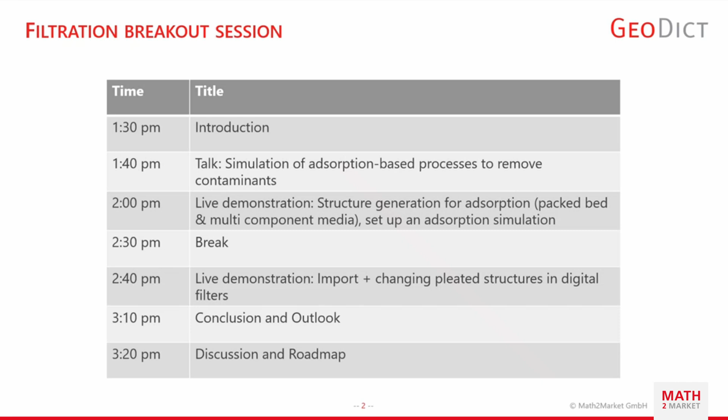Then we'll have a small break, depending on where we are in the schedule, to get some refreshments and coffee. We'll continue with a switch from media scale to element scale, where Christopher shows importing and changing pleated structures in GeoDict at the larger simulation scale. Then we'll conclude and give a brief outlook, including the roadmap and open discussions for further developments in the filtration business area.

The first live demonstration will be presented by Jonas Schabernack from our support team. It will briefly include the generation of packed bed structures, which are key to many processes dealing with adsorption, from carbon capture or direct air capture applications, to toluene and other chemicals harmful to humans and to engines.

Then the generation of combined filter media. This isn't specifically new in GeoDict, but we see it as one of the latest and greatest features, dealing for example with combi media, which are very prominent in cabin air filtration applications, including active carbon layers.

Last but not least, we'll give a short glimpse of how to set up an adsorption simulation: what the input parameters are, what we get as a result, and how we can visualize it.

The second live demonstration is given by Christopher Kühnle, one of my team members in filtration. He'll focus on the larger scale, as shown in the two pictures here, showing how we can import CAD structures from filter elements or complete filters with housing. He'll also showcase one of the features from last year's GeoDict 2024, where we implemented the generation of cylindrical pleat structures, allowing you to change the pleat count and pleat shape.

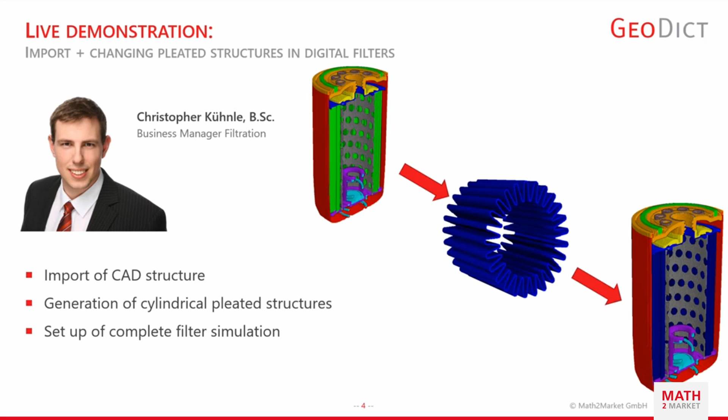From our end, as we saw today in the presentations, there's a large variety of new topics. Just to briefly summarize one key feature especially for the filtration industry: tomorrow we'll also see a presentation for our publicly funded project called ElexSim. This project runs for two years and adds an add-in for FilterDict, with the goal of tackling electrostatic forces, which have already been implemented in GeoDict, but which we're trying to improve and enhance.

One point we're already working on is a specific add-in for ElexSim, which now sums up all the electrostatic features. We implemented electrostatic decay, so electrostatics become less and less as more particles are deposited on top of the structure. We also implemented a dielectrophoretic force, and enabled different modes of fiber charge. To show that our implementations are correct and validated, we demonstrated that we can verify this with results from ANSYS.

But in GeoDict, instead of taking days, we simulate this in minutes. Open points still include ongoing validation work, and of course gaining new insights into electrostatics in general.

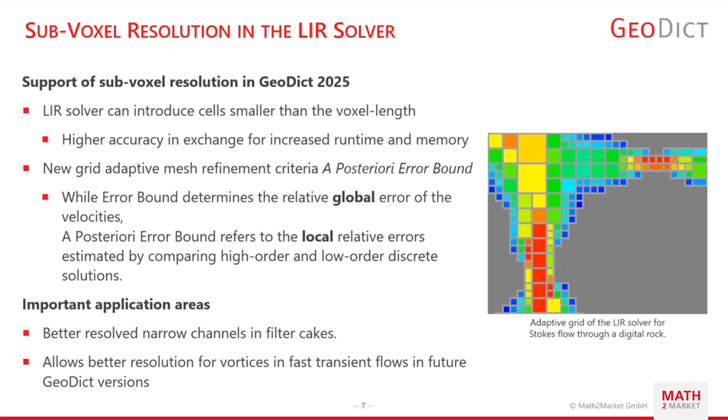Last but not least, one feature which is not specific to GeoDict 2025 is that we can colorize the particles in FilterDict by different parameters. First of all, we are able to analyze the depth of the particles and efficiency, so we can see if specific particles, how deep they reached into the filter media.

We can colorize the particles based on their deposition age, so we can see which particles were deposited in the first batch, in the very beginning, or at the end. This gives nice conclusions on how the filter behaves over a lifetime. These particle-based visualizations can also show residence times, number of bounces, or the status given in the FilterDict simulation, such as whether particles are trapped or outbound. These things help you understand your filter and give more insights into your applications over lifetime simulations.

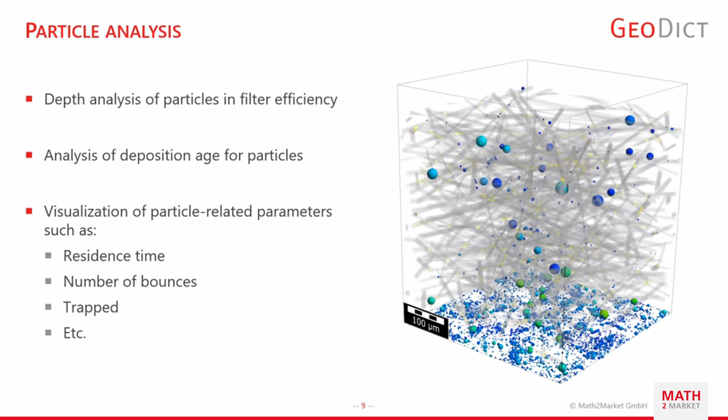Now I will move to the presentation of the newest feature in GeoDict 2025, on the topic of simulation of adsorption-based processes to remove contaminants. This is an additional feature in AddiDict, and I will start with the technique: how do we solve the adsorption, what assumptions are we taking, and which input parameters are needed. Then I will proceed with the validation, showcasing two validations to demonstrate that the method is valid. Then I will give an outlook on possible applications, both on the media and on the elemental side, which can give you ideas on how to use this feature in the future.

As already mentioned in the beginning talk from Martina about the new features, adsorption is a crucial process used in filtration of gases, contaminants, vapors, or odors.

And two important materials to mention here. So this is activated carbon and zeolites, which have the tendency to have large active surfaces inside of the structure, which are prominent to use in adsorption at the surface of these inner surfaces.

The specific areas we are having is clearly water purification, where we have very small contaminants which need to be removed. Pharmaceutical applications, where specific pharmaceuticals need to be deposited on larger surfaces. Classically, also cabin air filters in cars or in general in vehicles tend to have active carbon layers inside. Fertilizers in agriculture are one of the specific areas, to protect the farmers from the chemicals or pesticides.

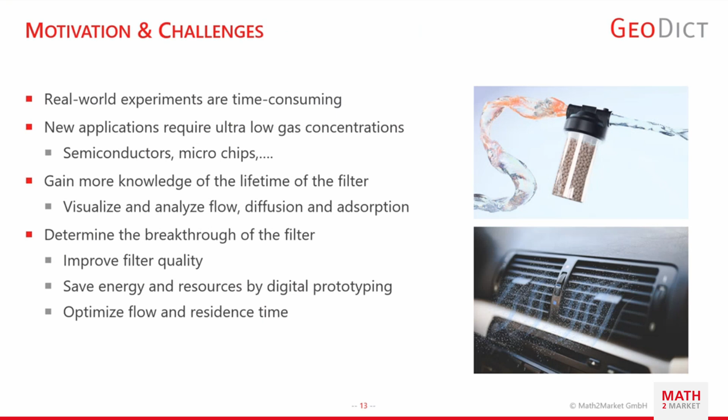In this sketch, I will show the adsorption process, how it's calculated in GeoDict. So as an input, we always calculate the flow around the structure. So we simulate the carrier gas flow. And one important parameter which we necessarily need is the diffusivity inside of, for example, activated carbon or zeolites. For the fluid, this is just a literature value for diffusivity, but it's quite challenging to get this effective diffusivity for the adsorbent material itself. It can be done experimentally, which is quite tedious or expensive, but we also offer the opportunity to calculate this in GeoDict itself.

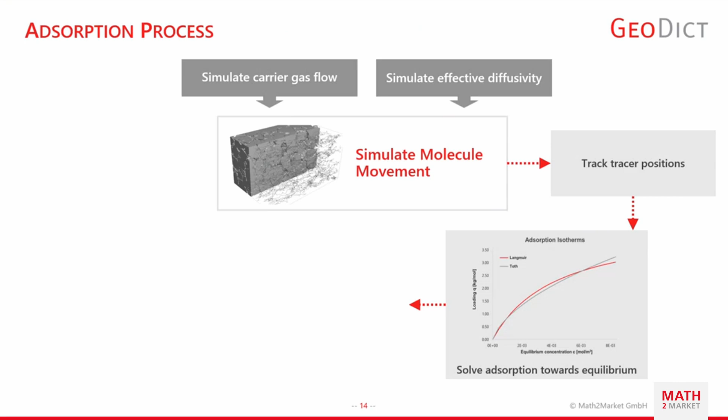After we have all the input parameters, we simulate the molecule movement of the particles and tracers. We track the tracer positions and XY coordinates. And then we use the Langmuir and Toth adsorption isotherms, which are, I think, well known in this regard. I will come to that detail in the next slides, and solve this adsorption towards equilibrium, so that we see how many free spaces are open, where we are at the adsorption isotherms, and how many places can be settled.

We then update the adsorbed load in the structure depending on how many particles have been deposited on the finite number of deposition sites. And then we calculate if particles reach the outlet concentration. And this gives us feedback for the breakthrough curve, which is one of the results we are obtaining. And this simulates one batch for an adsorption simulation. And we can, of course, in GeoDict simulate several batches, which then increases, as we see in the last slides, the concentration at the outlet with increasing number of batches.

On this slide, I will just briefly highlight the equations we are solving. So for the flow, we simulate Navier-Stokes-Brinkman equations. As we always deal with porous media in the adsorption simulations, we always take into account the Brinkman term. And for this, we also need effective parameters like the permeability and porosity, for example. The parameters for that are purely obtained from the adsorbent directly and from the conditions of the flow.

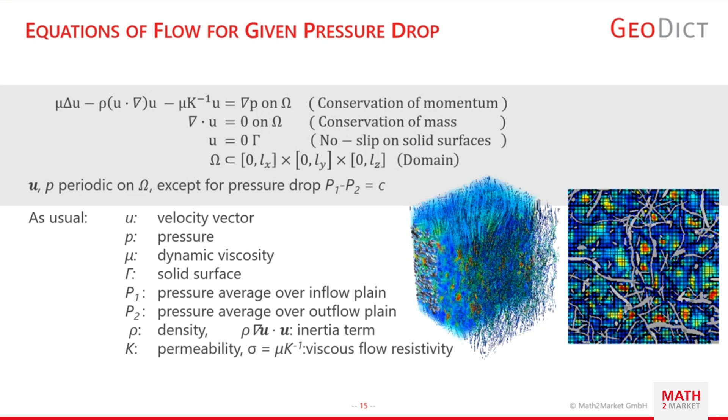I don't want to get more into detail with that, but we can also simply solve only the Stokes-Brinkman equation, so the inertia term is dropped. This can be also done, depending on the application and the flow rate we are having in the gases. The adsorption isotherms we are using are Langmuir and Toth. So I think most of you will be familiar with the most famous isotherm, the Langmuir, which considers just homogeneity of an adsorbent surface.

We have a finite amount of adsorption sites at the surface, and we can only adsorb one molecule or one tracer per adsorption site. This model is only valid for a monolayer, and we don't have interactions between adsorbates. So there's no interaction between the tracers during the simulation.

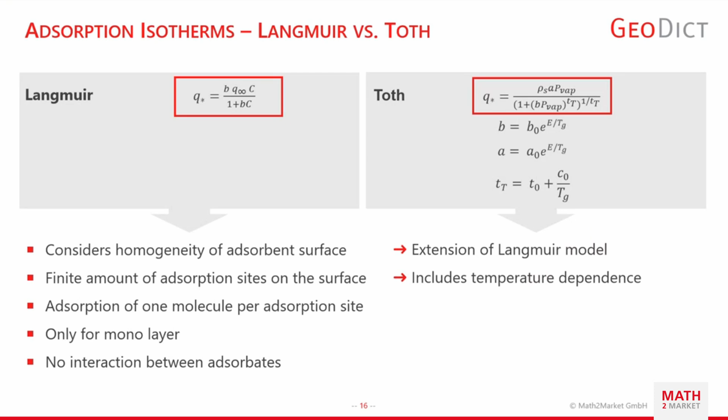We also took into account, for example, the Toth adsorption isotherm, which is an extension of the Langmuir model. It's a bit more complicated, so we need more coefficients from the laboratory experiments, but we also include temperature dependence. So we have, for different temperatures, different Toth adsorption isotherms. And this can later also be used, for example, for desorption, so that we have different adsorption isotherms at different temperatures to simulate desorption again.

And this is done over batches. So these bind to the surface until there are no adsorption sites left. And then at the end, the concentration at the outlet increases. Molecules can also detach and switch back to the gas phase, depending on where we are in the adsorption isotherm's equilibrium state. For this, classically for GeoDict, we use our voxel-based method. So instead of resolving the microstructure, we are using porous voxels.

The amount of adsorption sites is given by a maximum load, which is Q*. We use tracers inside the porous zone, so they lose or gain concentration, while the porous voxel itself gains or loses the corresponding adsorptive load. So when a tracer enters the porous voxel and loses concentration, the porous voxel gains adsorptive load. The adsorption speed is determined by the gas concentration and the number of free sites, and the desorption speed is only determined by the already occupied sites.

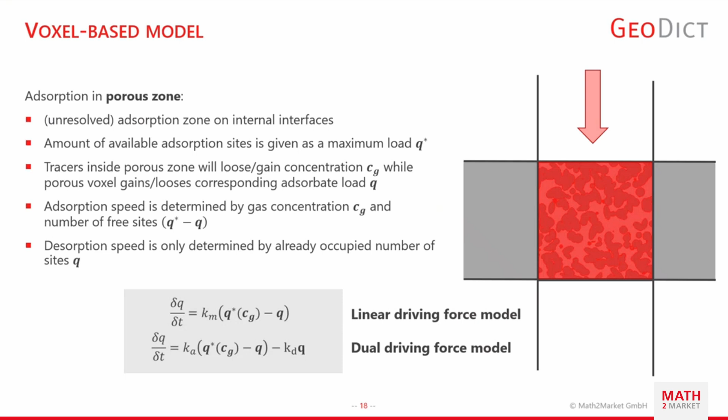For this, in most applications, a linear driving force model is used, which we're showing here. But additionally, if you want to separate the adsorptive and desorptive velocities from each other, you can also choose a dual driving force model, so that the adsorptive and desorptive kinetics can be separated, which in the linear driving force model are merged into one reaction constant.

After explaining how we simulate adsorption, I will go to the next step, which is validation. We have two validations presented here. The first one is CO2 injection on zeolites. Here we use a publication freely available on the internet, where we have pressed pellets of 2 millimeters diameter in a tube with given dimensions. And then we inject CO2.

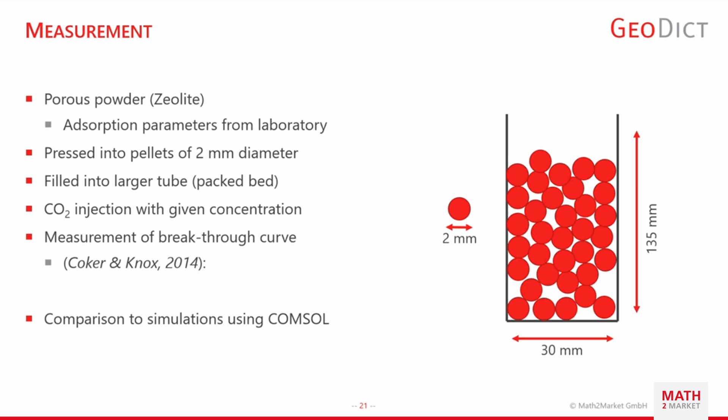The domain size, to get the numbers here, has been 350 times 350 times 2050, which sums up to 250 million computational cells. And in each batch, we used over 500,000 tracer cells, and the runtime has been 40 hours. And I think in this result, there have been around 20 batches. So you can imagine 20 batches times 500,000 tracers per batch in 40 hours is quite nice performance.

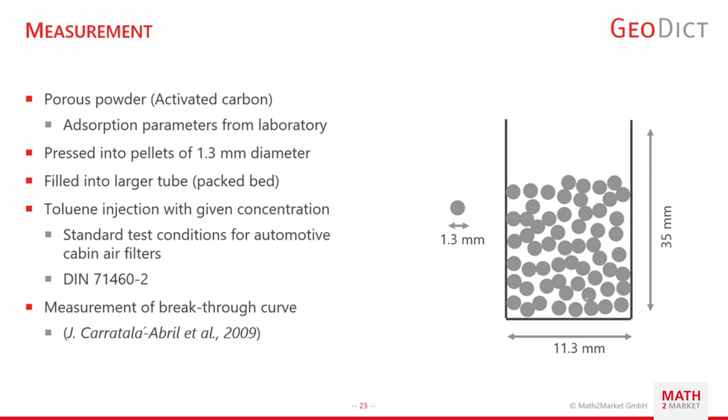The second validation uses activated carbon. And here we are using toluol injection, which is a classical standard test for automotive cabin air filters. And here we have a different tube with different dimensions, and the pellets have been smaller, 1.3 millimeter diameter. The publication was Carratalá-Abril in 2009, where they measured the breakthrough curve. And what we also see here is that we have a very good agreement with the measurements.

The domain sizes here have been more or less similar to the previous validation. We have 320 times 320 times 1,250 voxels, which sums up to 128 million computational cells. And we used 390,000 tracers per batch, which adds up to a runtime of 41 hours.

So with validation, we showed that for two very famous systems, CO2 with zeolites and toluol with activated carbon, we can reproduce the experimental measurements with GeoDict very well, which gives you the confidence to use the feature in your applications. And now we'll go for the application itself, giving some ideas where you could use this adsorption feature in your application.

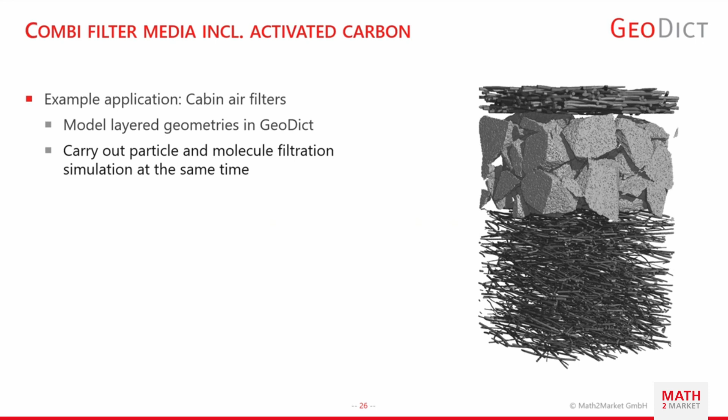One example I already mentioned at the beginning would be cabin air filters. This is also a topic in the live demonstration, which follows soon, how to use them in GeoDict. So we see here activated carbon beds, which are set between two non-woven layers. And here you could also think of carrying out particle and tracer filtration at the same time. That's also possible in GeoDict.

What we see here, for example, is the adsorptive load: at the beginning, the particles come from the top to the inner. Things to optimize here would be giving enough time for the adsorption to happen, increasing the surface area through smaller particle diameters, and choosing different materials to enhance the filter performance. This also gives a benefit to the suppliers, for example.

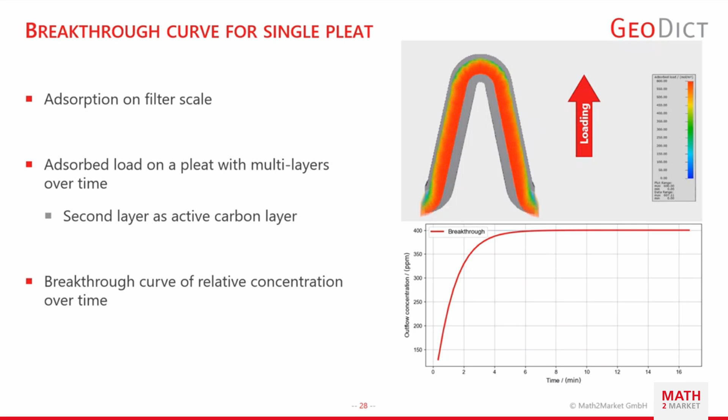The breakthrough curve is also highlighted on the right-hand side. And using this in combination with the pleat optimization would give feedback on, for example, how much adsorptive load is necessary, and whether we can make the layer thinner and have more pleats in the same surface area active for adsorption.

The same applies when we have several pleated structures to represent larger domains. The same also applies to the second live demonstration of Christopher, where we can load CAD structures and then put cylindrical pleats with several layers into them, and simulate on entire filter cases the adsorption and the flow. So this gives you 2 parameters. We have the flow, which is anyway of key interest for digital filters, but we can also simulate adsorption at the same time or in a coupled simulation.

One topic to address is the desorption again. So this, for example, is the more or less reverse option for the adsorption. So here we can use an already fully adsorbed structure, and we can simulate this desorption. For this, we load the structure, and then we can, for example, increase the temperature, which is then represented by a different equilibrium by either Langmuir or Toth, which is at a different temperature, which then features more the desorption of particles than the adsorption. And simulate then here the desorption process.

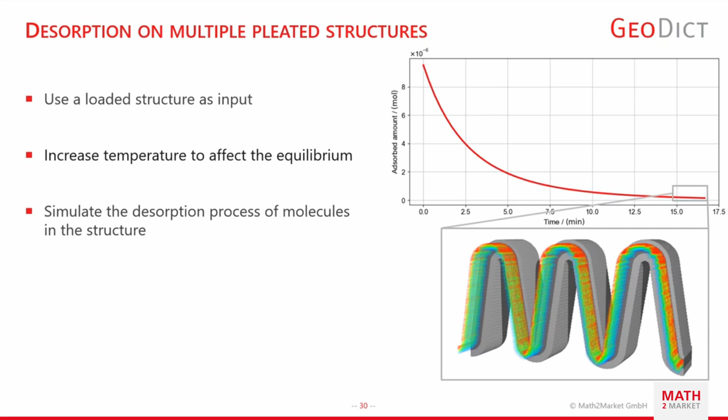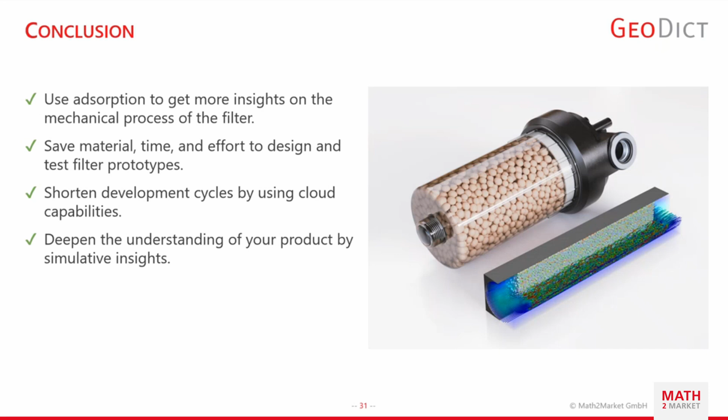A small outlook, we'll come to that also later on when we look at the roadmap. So far, the adsorption has not been validated. We will look out if there are possibilities to do that. The equations we are now using are only focusing on gases. We'll also extend them for liquids to use them also in, for example, water treatment. Temperature changes during the process: we know that when we have adsorption taking place, most of it is an exothermal process, and therefore temperatures locally may change. So this is also something we have on our roadmap.

And on longer terms, we have also a presentation tomorrow which deals with part of that, is that we have an entirely new solver, which is not Lagrangian-Euler-based anymore, using tracers as we're using now, but we can use here an Euler-Euler approach, which then moves concentration fields through the domain. This is a lot more efficient, and we can also use it in high concentration fields. But I think to have both options available in GeoDict is very nice: when we move to very low concentration applications like semiconductors, microchips, and when we have large concentrations, we can choose a different solver, which is more efficient, and cover both applications.

Yeah, then thank you from my point, and I will hand over to Jonas to give a live demonstration on the structure generation for adsorption and adsorption simulations. Thank you.

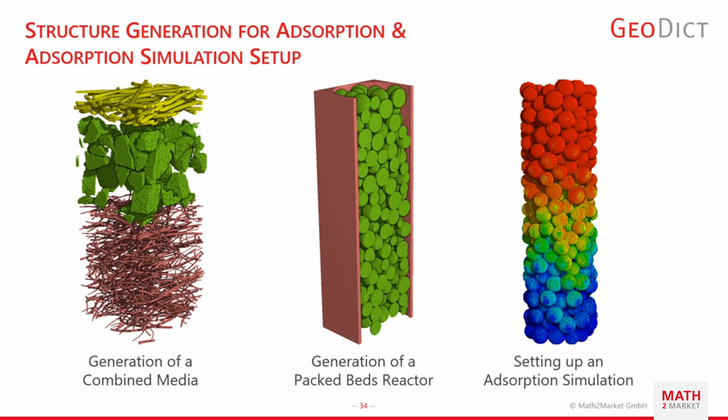And so for the first part, we will create this combined media. This consists of these three layers that we've seen before, two fibrous layers and one activated carbon layer. So I will start by creating the first fiber layer, and I will use FiberGeo and create fibers for that. I first rename this. This will be our bottom fiber layer in the end, so I will just rename this to this. And keep the settings as is, create it a little bit larger in Z direction because we want this stack. We don't want any fiber overlap because it's quite unrealistic if we look at a real sample. In this layer, we want quite a low volume percentage.

And in the fiber options, I just removed the default ones. Here we use some curved circular fibers, and we use two different types. And now we want to set the volume percentage of each of those, and we just want 50-50. I can change this here. And then we can set the diameters. In this case, we choose a Gaussian function for the distribution of the diameter of these fibers. And this mean value here is 4.5, and then we just have a distribution around that we can see here.

The length we will increase to double the size in X and Y direction because we don't want too many fiber ends in our structure in the end. And the orientation should be anisotropic, which it already is by default, but we still increase the anisotropy a little bit more. And you can see it favors the X direction and mostly in the XY plane.

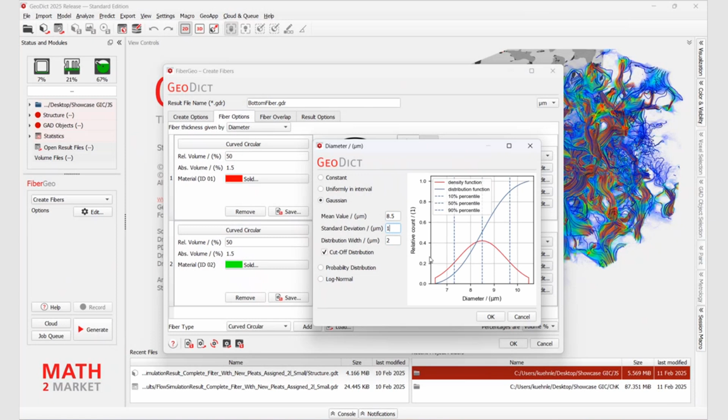For the second fiber type, we will do a very similar thing, but we increase the mean size of the fibers here. And we also choose the same parameters here. Don't change this. And we will increase the anisotropy a little bit.

So now with these settings, we can already generate our structure, which will only take a few seconds in this case, because the longest part here is to remove the overlap. And because the solid volume percentage we have here is quite low, this will be very fast. We have the debug output. Don't need that. So here we can see the voxels that are overlapping, and they will be currently removed by moving these fibers around. But here it's quite easy to find the ideal structure without any overlap.

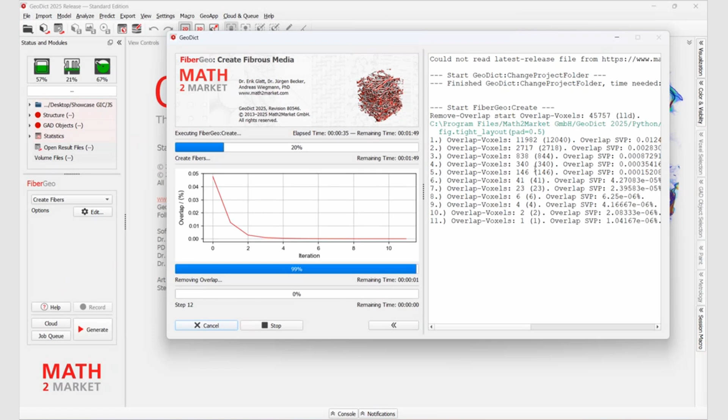And when this is finished, we can continue. It's finished now. Get a result file, which we don't need right now. And then we can have a look at the structure in 3D. Visualize this a little bit more nicely. And we have these two fiber types in our structure.

Now for the final sample, I want these fibers to be the same material. So I will reassign material ID and change all of the fibers to one material ID that we have then in the end.

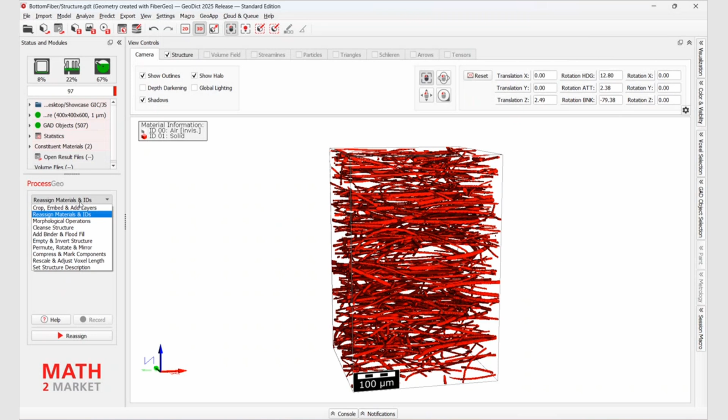So the next stage is to create these activated carbon grains. And these we want to pile into our structure. And for us to be able to do this, we need some empty space. So we also use ProcessGeo, and then we embed our current structure. And we will add some empty voxels in Z direction because we are piling the grains from the Z direction. And we also add a little bit of voxels because this will be our inlet if we run any flow simulation later on. So we can just add and we create some empty space.

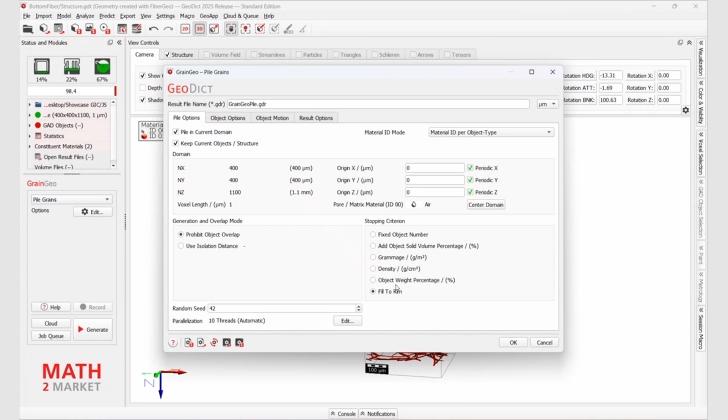And now I will just flip this, so the grains that we are piling in the next step are coming from this direction. So we go to GrainGeo, and we want to pile our grains into the structure. To be able to do this, we pile in our current domain, and we also want to keep the fibers that we have right now. We don't want any overlap, and we just want to fill it up completely in the objects.

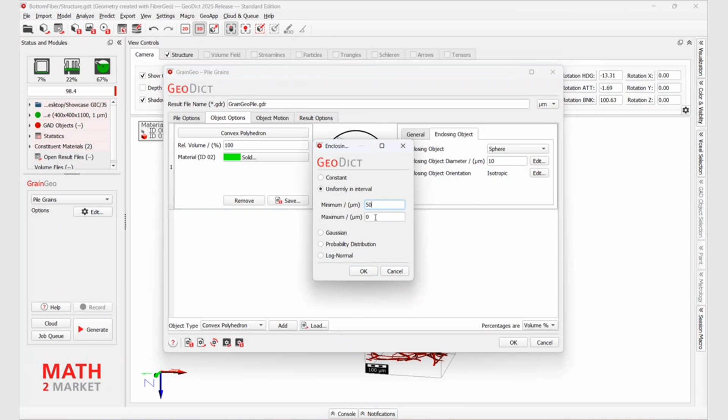So now to create these activated carbon grains, what can be very useful are these convex polyhedrons. And here we can define quite complex polyhedric structures. So here we change the point mode, how these points are distributed to the surface. And we also want to vary these corner points a little bit. So here we choose uniformly, and we want between 7 and 10 corner points, not that many. And then you can define an enclosing object. We can stick with the sphere here. And we also want a uniform distribution, and we go between 50 and 200 micrometers.

Then we define the object motion, so how the piling is basically simulated. Because of the time constraints we have here, I will reduce these requirements a little bit. So this will not be the perfect piling result, but it will be quick enough. So with this, we can start to pile them. And this also depends on the geometry of the particles. These are a little bit more complex than spheres, for example, so this takes a little bit longer, but it shouldn't take too long, I hope. It should be 1.5 minutes roughly.

And as a result, we will have these grains piled on top of our fiber structure, but they will be quite artificial still because they have completely flat planes between those corner points that you will see. So I will show you a bit more functionality afterwards, how you can make them a little bit more realistic.

And I guess this time overview in this case calculates with the perfect piling, so this is not correct in this case. It will be quite a large jump after, I think, 7 or 8%. So in this case, we just wait a few seconds. On my laptop, it took 1.5 minutes roughly. Should be the same here, I think. Yeah, I think it's fine. It's 7-8%, and then it will jump.

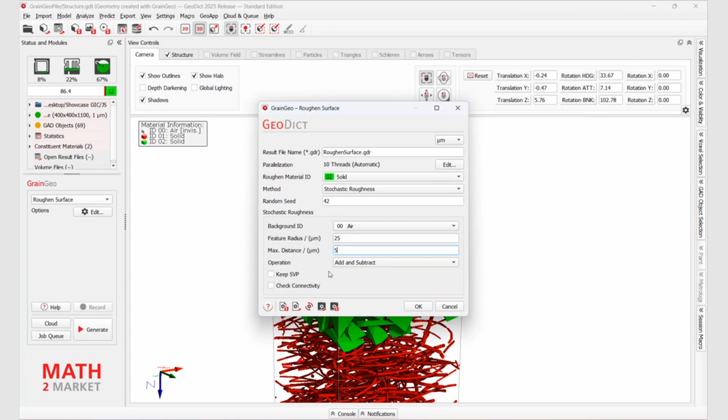So the first thing we can do is roughen the surface to get some variation. We want to roughen our grains, which are solid number 2. We define a feature radius, which we set to 25 here, and the distance for how we want to vary it. Then we vary the surface by adding and subtracting voxels. We also want to check for connectivity, so we don't have anything freely lying around later. This will now go over all the grain surfaces and modify them a little bit.

In the next step, we also want to add some resolved porosity. As mentioned before, these particles have porosity that is not resolved in the simulation, but for these particles we want to add some resolved porosity in addition, so we have pathways that we can simulate later with the flow. In this case, we don't use the structure for the simulation. I'll show you how to add some basically random porosity to these particles in the next step, once this is finished. And in the end, we need to add the second fiber layer as a final step.

It takes a little bit longer than it did before. But now this is finished.

And now, as we can see, we have some rough surfaces on these grains.

To add the porosity, I first need to save the structure, so we can just include what we have in here, and we can get rid of it.

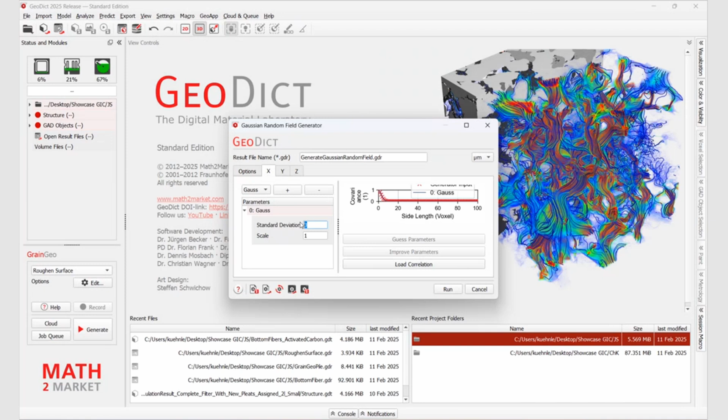To generate some random porosity, we will use a Gaussian random field. Here we need to set the same domain size as our structure had before, which is after the embedding, this size. Then we can define a Gauss function in all spatial directions, and I'll change the standard deviation to 2. Running this, we get a volume field that has a random distribution of values depending on the Gaussian field we've defined.

By using a threshold, we can separate between pores and solid voxels. These solid voxels we can then subtract from our other structure to create some porosity. By tuning the threshold value, we can tune the porosity we want to add.

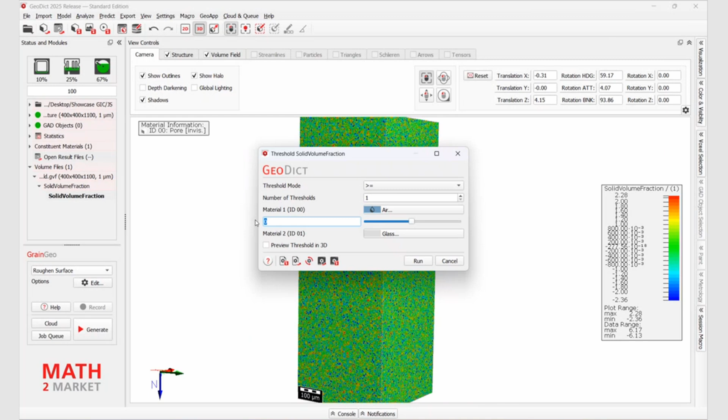So now we have this volume field with the same dimensions. If we right-click the volume field, we can threshold the structure. If we select 0, the Gaussian distribution is centered around 0, so it will be 50% porosity. If we want a little less porosity, I'll choose 0.5 instead. Running this, if I disable the volume field, you can see the structure - 30% is solid, and we will subtract the solid voxels in the next step, so it will add around 30% porosity.

What I also want to do for the structure now, before I save it, is change the material ID. At the moment it's material ID 1 for the solid. I want to change it to material ID 2, and I'll explain why in the next step.

So now we also save the structure as the Gaussian random field, and we load our old structure.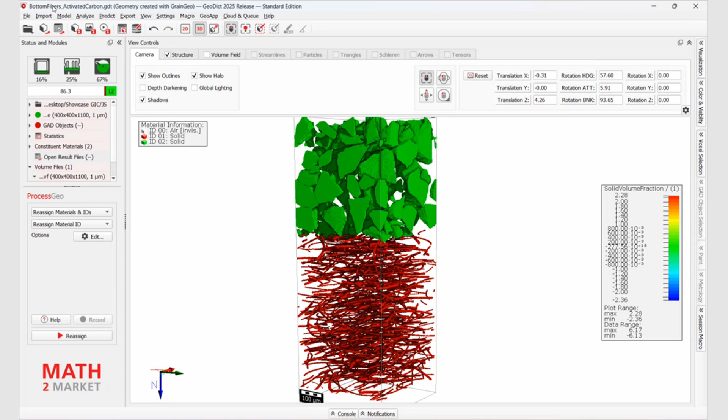Now we can use layer geo to subtract the random field from it, but we don't want to subtract anything from our fibers, which is why I changed the material ID. Now, if I click subtract bitwise, it will only subtract from material ID 2 because it has the same material ID. So now the fibers are still intact, and we have some resolved porosity in these activated carbon grains. We save the structure as well.

We use the same name and add 'porous' in front of it.

In the final stage, we use FiberGeo again to create the second fiber layer. Here we create a new structure for now, which only has 100 micrometers thickness, but has a higher solid volume percentage, 15% I think.

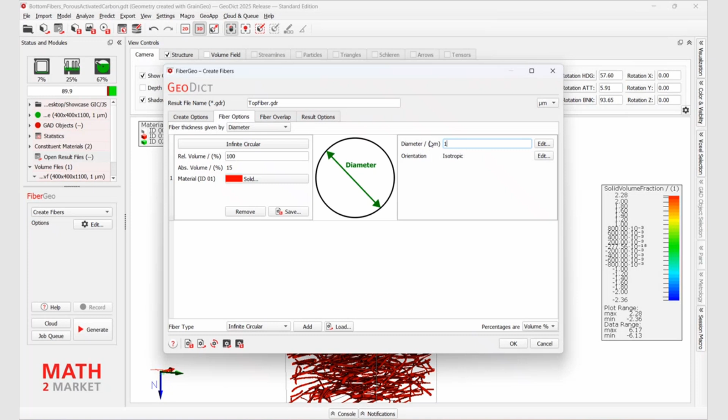Here we use completely straight fibers, so we can use infinite fibers with a circular cross-section, so we won't have any fiber ends in our structure. We can also use a set diameter and add some anisotropy, so we have an XY plane orientation. This will take a little bit longer than the previous fiber generation because we have much more overlap, as you can see here.

This is a bit more difficult to remove. And at some stage, we will also, because we allow it by default, start to deform the fibers a little bit, and this will reduce the overlap voxels quite strongly.

Settings correctly. Then in the next step, we have basically created a new structure that we can attach to our old structure. Then we have these 3 layers together that we could use for an adsorption simulation.

Now it starts to deform, which takes a little bit longer to compute, but it will reduce the overlap voxels quite drastically.

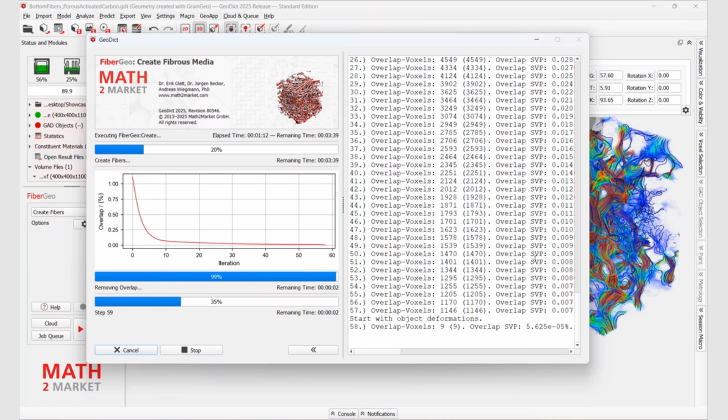And then be finished afterwards. And then we have this fiber layer that we can again save, for example, as top fibers. Just to be able to separate it, I will again reassign the material ID of this one, and this will now be our material 3.

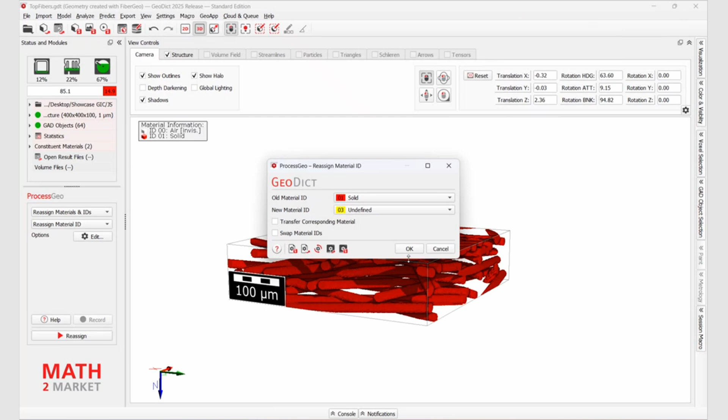And then I should save it again. Should have done before saving. And now we load the old structure.

Porous particles. And we can use, again, LayerGeo, and in this case we use attach. We want to attach them from the Z- direction, so we have to select this, the correct structure. And then we run this.

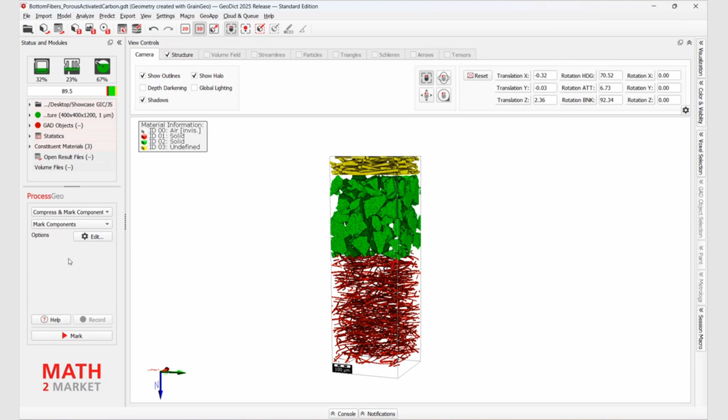Now we have a few things that we need to post-process. The first thing we can use, for example, is also in ProcessGeo, we can compress our structure a little bit in Z direction. Here the default, we need to compress, and the default is 10%. We can just use this to press our structure a little bit further together.

Another thing we should take care of, because we added this porosity just by subtracting voxels, we are not sure if everything is still connected. We can also use the Cleanse function, which just removes components smaller than a given voxel number. This is usually much easier for the flow simulation, for example. If you have single voxels flying around, that's not very helpful.

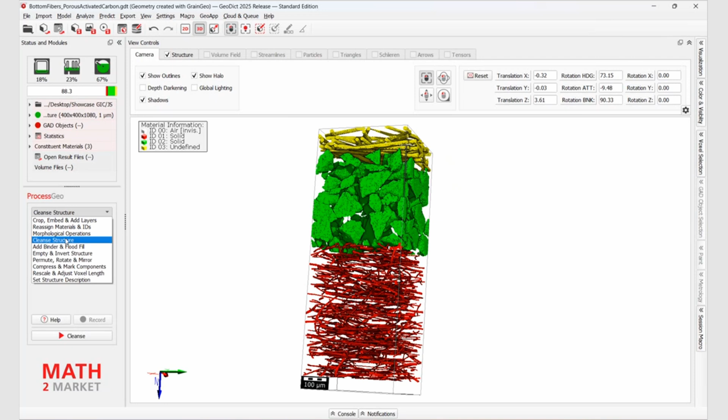The last step we need to do is consider that the adsorption simulation always runs from Z- to Z+. If we want our flow to come first through this fiber layer and then come from the bottom, we can mirror our structure along the Z-axis. Then we would have our final structure. Now we can turn it around, and this would be the final product.

Okay, then we continue with the packed reactor. This will be a little bit quicker. So first, let me just get rid of all of this.

And then to create a container, we will use the GadGeo module. First of all, we can set our domain size, and in the end we want to end up with a tube, so we also increase the Z direction again, and we also increase the voxel length in this case to 10.

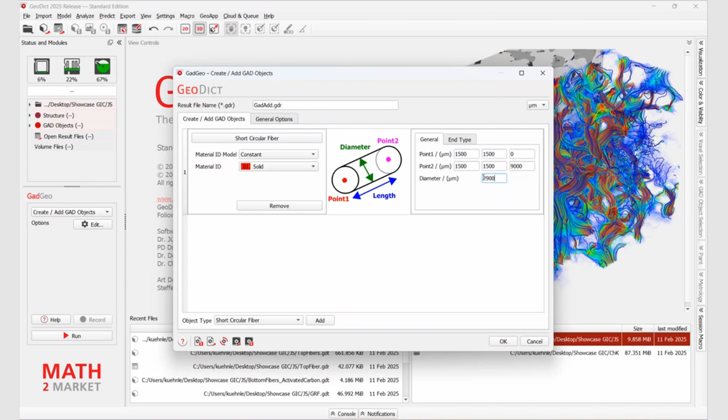And now in this domain that we create, we just want to add one fiber. Here we can define the endpoints of this fiber, so it should be in the center of our domain in X and Y direction. One endpoint should be 0, and then the other one should be 9,000, so 900 voxels times 10 micrometers. And the diameter is 2,900 because we want some rim around the structure in the end.

So if we click run, this will be very quick, and we will just end up with this fiber. Now, if we right-click the structure, we can invert, and this will give us a tube.

And now we can again use GrainGeo to pile the grains. I want to first get rid of all the settings that I did before. Then we pile in the current domain and keep the current structure, of course. We don't want any overlap, we fill it completely. And here we just want a sphere.

And the diameter we also vary, spheres of different sizes, between 500 and 700 micrometers. The object motion, I guess we can leave as is. You can see it should be not too complicated.

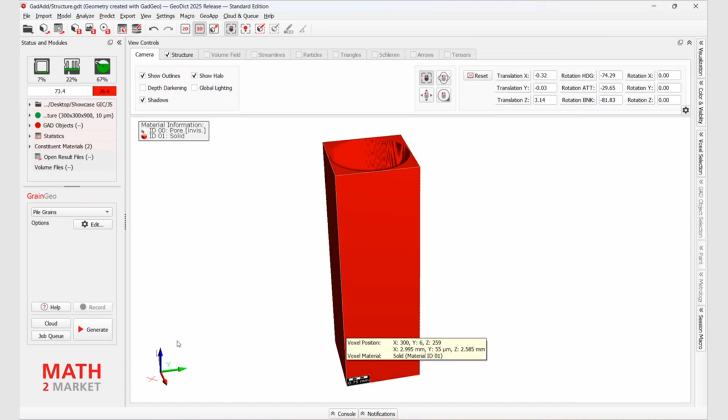Now, I didn't name the previous file, in this case I can just overwrite, but it depends on what you need. And now the piling of the spheres should be much faster than the polyhedron.

For this case, we also have a tutorial available on the website where we use more complex pellet shapes. You can design pellet shapes with, I think in the example, some holes inside of the pellets as well, and also pile those grains. So whatever design you need. In our integrated test system, we have a test where we pile small Christmas trees, so it even works with very complicated geometry.

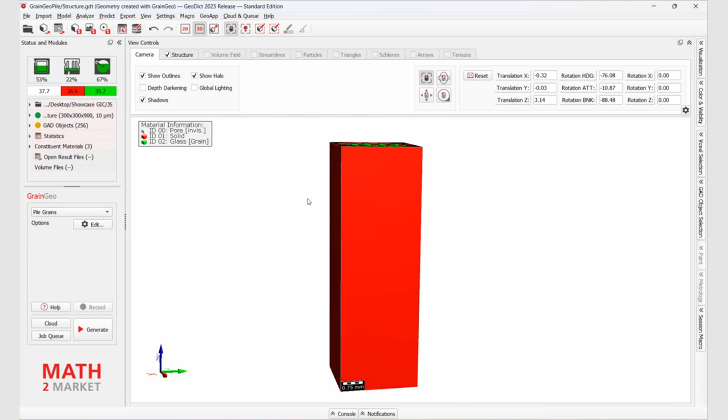And then we just end up with this kind of structure. Now if we are happy, we can use this for an adsorption simulation, for example. On an example like this, I will show you how you can set it up and what the results are like. So to access it, we go to Predict, then to AddiDict.

And then down here, we go to the Advection Diffusion GeoApps and choose Adsorption. If we click edit, we get some settings. I cannot show all of them, so I will scroll through. I will load some settings that I've used for the simulation whose results I'll show you later.

I've saved it to a newer GeoDict version, so the interface differs but the settings are still the same. Up here you can, as in every dialog, give a result file name, then set the total duration of the simulated time, and the number of batches, as we have heard before. The tracer per inflow voxel is basically how precise you simulate the distribution of the adsorbent in the system.

The default value is 5. You should not go lower than that, otherwise you can get artifacts. You can increase it further, but that increases simulation time.

Then here you could start, if you want to do a desorption simulation, you could select to start with an already adsorbed state. You can load this - this will be one of the results later on for the adsorption simulation. So you could load one of the results here to desorb again.

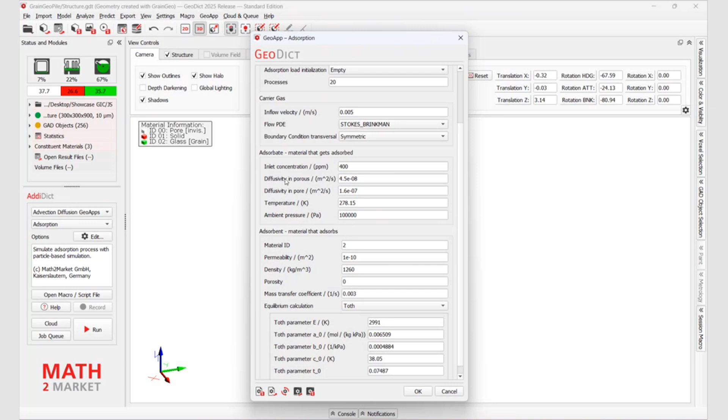The processes, of course, for the parallelization. Then here you can set the simulation parameters for the FlowDict simulation. And down here, scrolling now, you can set the parameters for the adsorption - the concentration, then the two diffusivities in the pore space and inside of the adsorbent material, the temperature and pressure. And here you need to define which material ID is adsorbing.

You can set the permeability, density, porosity of the particles, and the mass transfer coefficient. Down here you can select the Toth and the Langmuir isotherm models, and depending on what you choose, you need different parameters that you can get from literature experiments. You can also get a table if you have some values yourself that you can import.

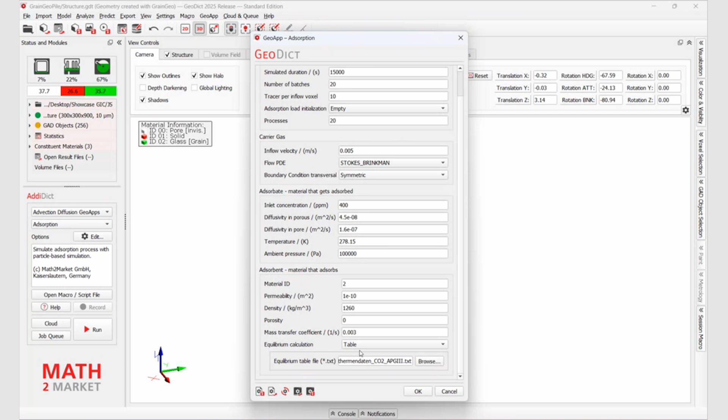Once you have set it, you can just click OK and run it. And in the end, when you have finished, you will get a file like this - of course, again, a GeoDict result file.

You see how many batches were solved. You always have an initial batch, so that's why it's 21. And then you can calculate different times at which 5% of your inlet concentration reached the outlet. So it's 1.5 hours, then 50% is after 2.1 hours, and saturation is after 2.7 hours.

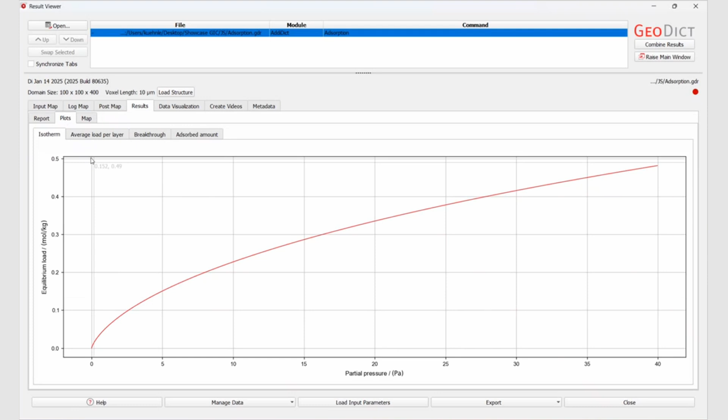You also get this in a table, but you can see it a little bit nicer in a plot. So the first plot we see is the isotherm. Then we can see the average load per layer for all the batches that we have computed, so you can see the progression throughout your structure for the adsorption.

So which layer becomes saturated at what time. The breakthrough curve, so the outflow concentration over time, and also the adsorbed amount over time - it's to see at which time you get saturation.

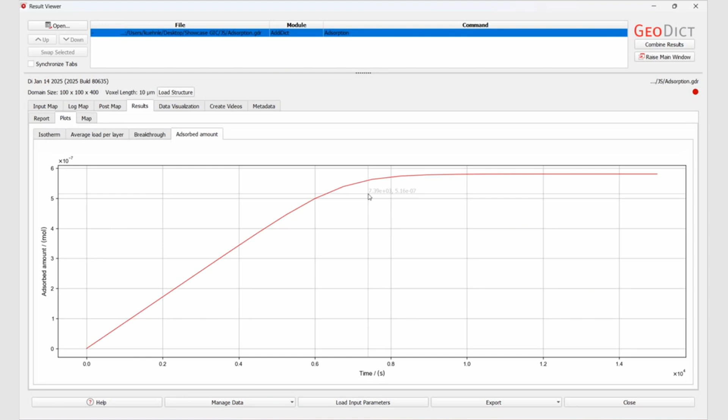To visualize it, you have down here first of all the flow field and the trajectories, but for each batch you separately have the adsorption state. So, for example, load one of these, and we go to the main window, disable the structure, and we only want to see it on the particles. You can see now this is the direction. Here you see the load on the particles and the distribution over this structure.

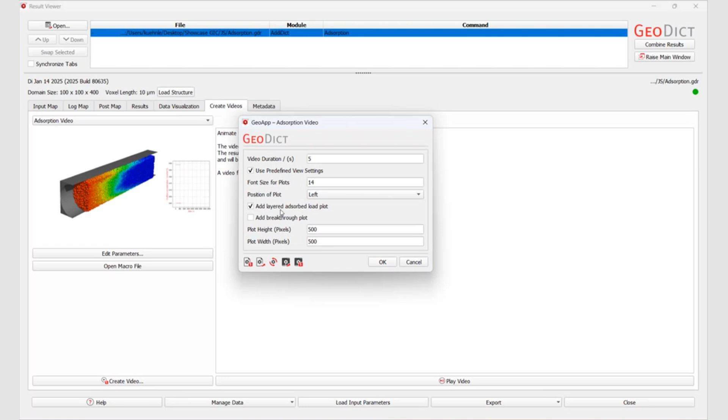And using all this information, you can also create a video for reporting. We have a macro available for that. You can add two plots, the breakthrough plot and the layered adsorption plot, and I have also generated this.

So here you see the 2 plots, and they also basically add their points over time. And in the center, you see the distribution of adsorption. But you also see by using both of these, so here you would think that the adsorption, the saturation state is reached a little bit earlier, but as you can see in the breakthrough curve, there's still some adsorption happening inside that you don't see with the visualization that I've chosen for this video.

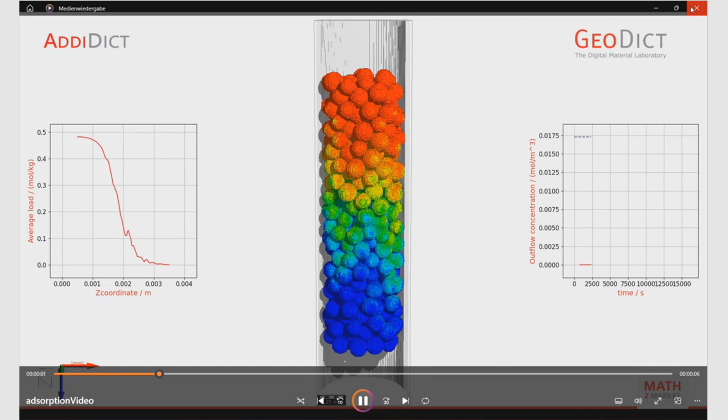But you can choose different kinds of, you can also cut your particles, for example, if you want to look what's happening inside, what we've seen before for the adsorption. In here, clip Y. You can see the state that's happening inside of these particles.

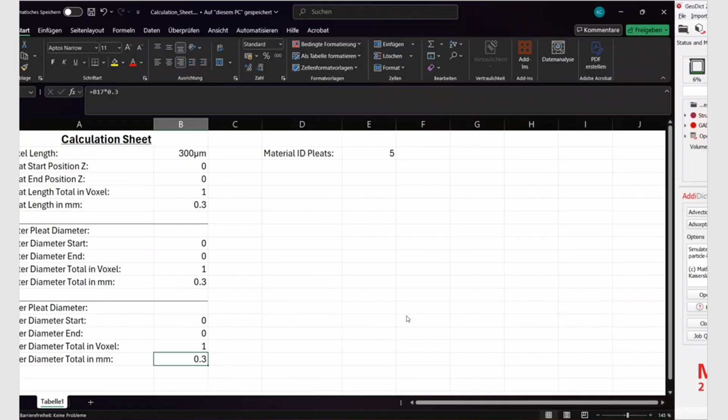behaves through the structure. For this, I've also prepared a small calculation sheet, which we will use to actually calculate some diameters. Those values normally you can easily obtain from your CAD data or from your CAD engineer. If you do not have them in there, it's really straightforward how to actually change them and how to actually calculate them. We will start the process now.

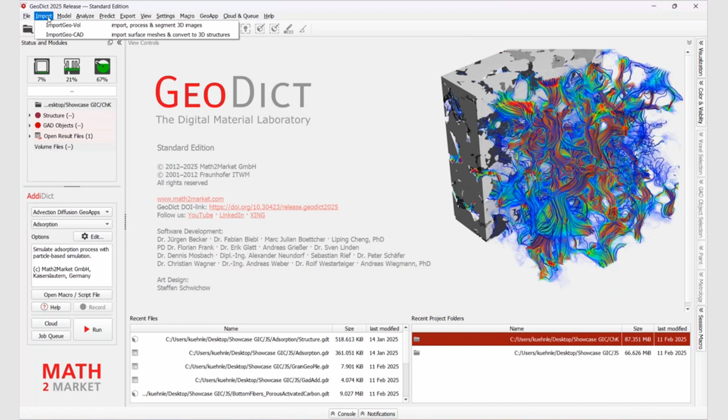So like I said before, the first part is actually to import the CAD data. For that, we will import our structure. In there, the first thing you should always do is check if the unit in your file is the same as in the import CAD file. In this case, it will be meters. And we then have to definitely check what are the lengths in here and what are the dimensions in there. For that, we have an option to

actually suggest those in GeoDict. So if you choose the voxel length, for example, then the voxel length of the structure generated will be 300 micron, and GeoDict will then calculate all the other values in there. One also very important thing is that you should always check what the pore material looks like. In this case, we have an oil filter, so we change the pore material to oil.

After that, we check these values, and we pretty much see that the voxel length is fine in there. And after that, we import the structure directly in GeoDict. This will take a few seconds, and after that, we will have the structure in GeoDict, where we can actually then change the pleats inside of GeoDict. So we do not need the surface triangulation now, so I will just skip that.

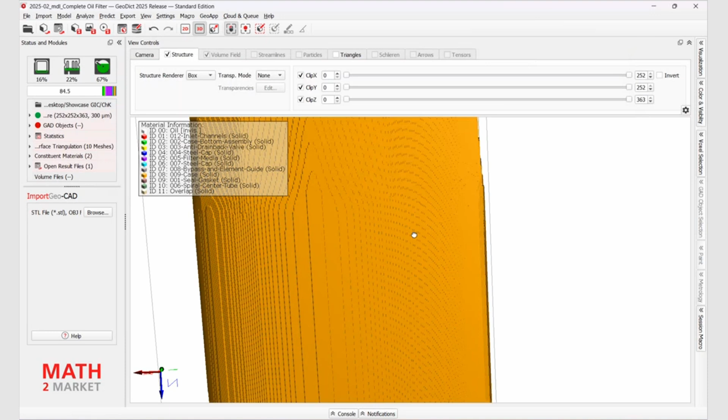And as you can see here, this is the structure we have imported into GeoDict. And from this point on, we can actually also slice through the structure and see what the structure looks like. And if you slice through the structure, you can see that we are having a filter in here, and we want to get rid of this filter because we want to actually replace the filter with another filter.

So like I said before, to actually change the filter, we need some dimensions of the filter because the new filter should fit in the space where the old filter was. And for that, the easiest way is actually to go to 2D view and choose the right angle. I will just unclip the structure. And from this point on, we can pretty much go through the structure.

And as you can see, at some specific points there, we will actually see that the filter starts, the pleats are actually in there, and you can directly see them. So because we want to know the total length of the filter, the easiest way to see that is that we actually slice through the filter and see that on slice 32, you can first see the pleats in

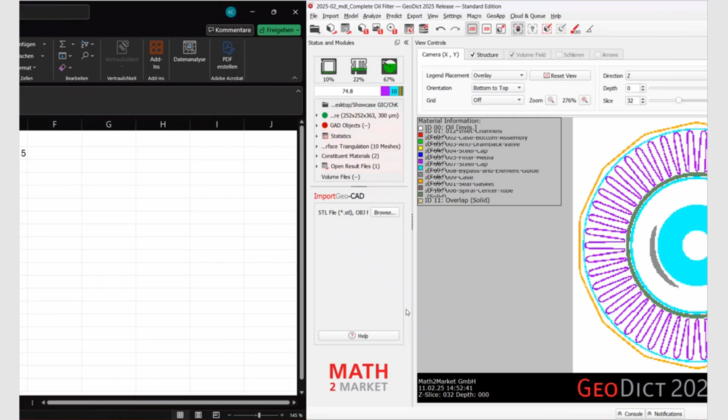there. So like I said before, we have a calculation table, which is straightforward, which says the pleats' start position was 32, and then we slice through the structure till we get to the end of the filter. And as you can see here, the last slice is 315.

So what we basically do is we write in the last slice in here, and what this sheet does is it calculates the total length of the filter, which is the end position minus the start position plus 1. This is the length in voxels, and this is the length in millimeter afterwards. You can normally easily obtain those values, like I said, from your CAD engineer, or you can also obtain these values directly in GeoDict.

So to actually model a filter with the same dimensions, we also have to know the dimension of the outer and the inner diameter. The easiest way to obtain these is also to clip through the structure. As you can see here, we can clip in X direction. And at one specific point, if we go one slice deeper, we will get some information and actually cut one tip of the pleats.

So we know that the outer diameter of the pleats starts at 12. It starts at 12, and we go to the other side to see what's the end position. As you can see in here, the last position is 239. So we type in that value in here, and it will then calculate the total amount of voxels and the total amount in millimeter directly.

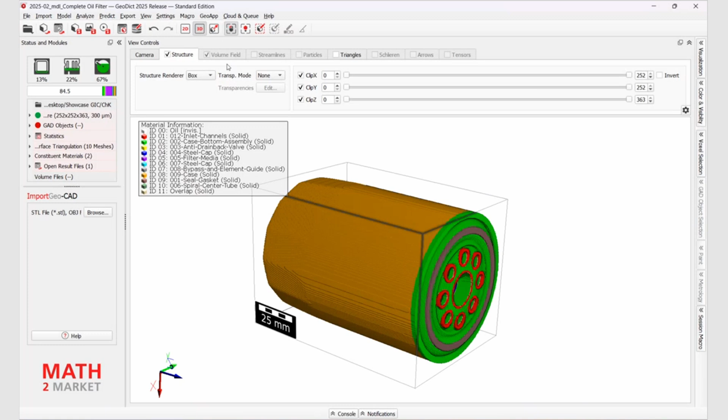The easiest way to get rid of this is to look for the filter media. In this case, it was ID number 5. You could also slice through the structure again to see if it's the right media, and as you can see here, it's written in there: voxel material number 5. So we want to reassign the material of ID number 5 to our fluid, which is in this case oil. We assign material IDs, reassigning ID number 5 to our new ID number 0, which is oil. And if you run this, you can see that the pleats are gone in this complete filter now.

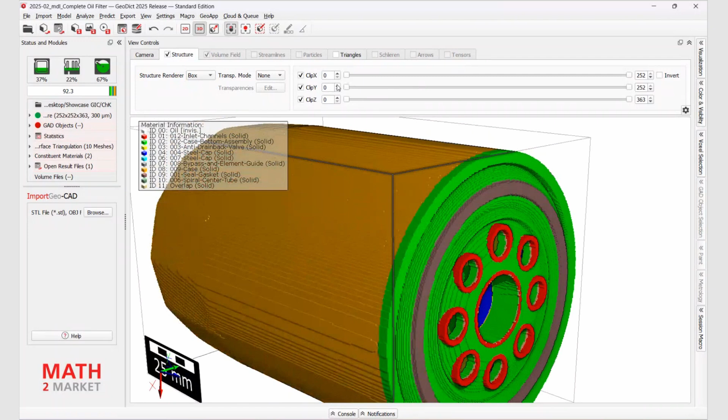From this point on, we want to save the structure, because as a next step we will create a new filter which has a different amount of pleats with the same dimensions, and we will then add this filter inside of GeoDict. So we will save this structure as filter without pleats.

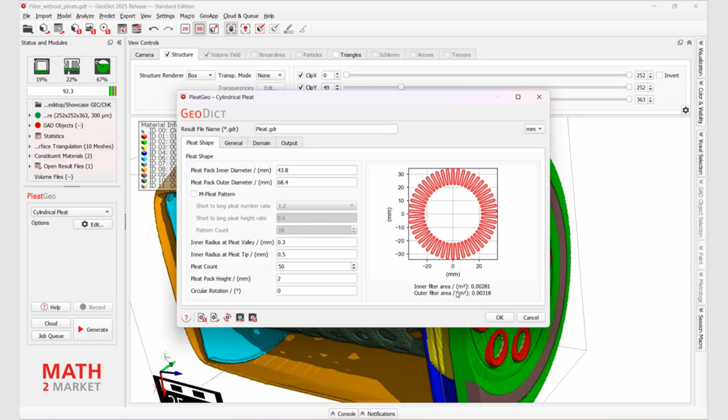The next step is to create new pleats in there. For that, we go to PleatGeo, and we want a cylindrical pleat. The first thing we definitely have to check is that the voxel length of our new pleat is the same as the complete filter, because otherwise we cannot add them to each other. So we check that the voxel length is the same, which is 300 micrometer, here 0.3 millimeter.

From this point on, we can change, for example, the number of pleats. We can increase them, decrease them, and so on. In this case, let's go for 50. You could also use an M pleat pattern or different shapes. But the first thing it asks you is the inner diameter and the outer diameter. That's why we have this sheet, which says the outer diameter is 68.4 and the inner diameter is 43.8.

And I've also already added those values in there before, so that this actually matches the size of the filter beforehand. We could model the complete height in there, but there's a faster way in GeoDict, because otherwise it will create a GAD object, which is incredibly powerful, but it's not needed in this regard. And this GAD object takes more time to generate.

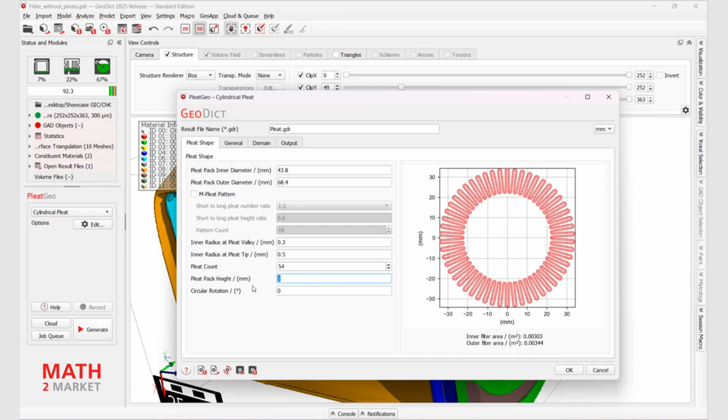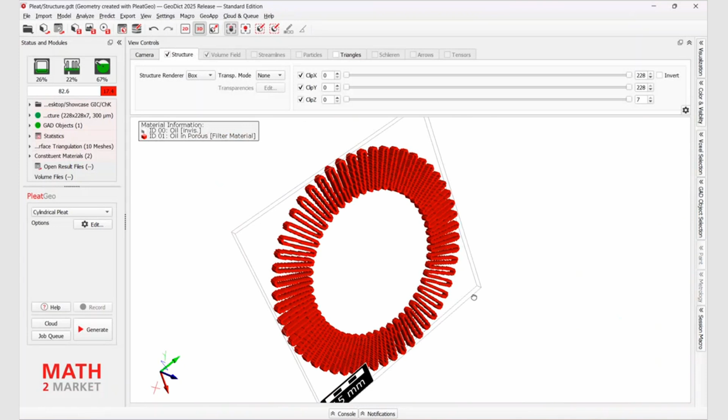But in this regard, we just go for a very small height, and then we will increase the height of the filter completely. You could also add more layers. You could also change the thickness of the layers in here. But for this showcase, we just leave it as it is now, and then we generate a new pleat in here. As you can see, it is currently a very small pleat, but we want to enlarge it to actually fit in our new filter.

So we want to repeat our structure, and our structure is currently 7 voxels large, and our structure should be in total 284 voxels. As you can see here, those are the values we obtained at the beginning. Which means that we have to increase our structure by 277 voxels. We will run it, and then we have the new complete pleats in here.

The next thing we want to do is change the material ID of our material 1, because we later want to add it to the old structure. And if we keep the material ID 0, 1, and the other one is also 0, 1, they are not distinguishable after all. So we will change the ID firstly.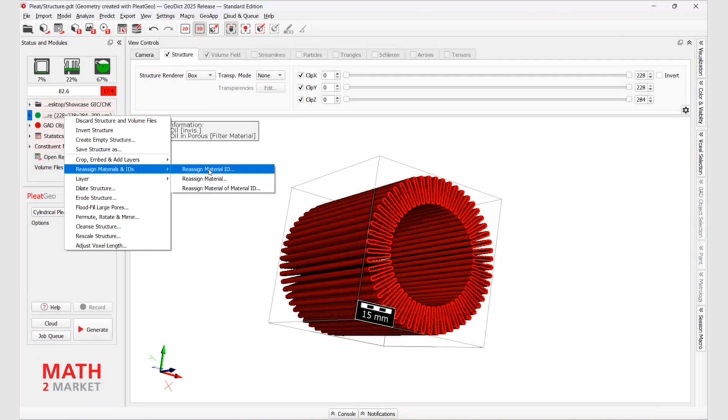So for that, we just go for Structure, Reassign Material. We want to reassign material ID. And last time we used ID number 5. That's why we can also use ID number 5 now. And we will run it. So then it will be ID number 5 in here. From this point on, we just save the structure as it is.

And we will actually load our GDT file. We will load our filter without pleats beforehand. And from this point on, we will use LayerGeo to actually get those structures together. We just add a new file in there, and for that, we want to add the pleats. You can see those dimensions do not match perfectly because this one has a larger X and Y direction. And we want to make sure that we have it perfectly placed in there.

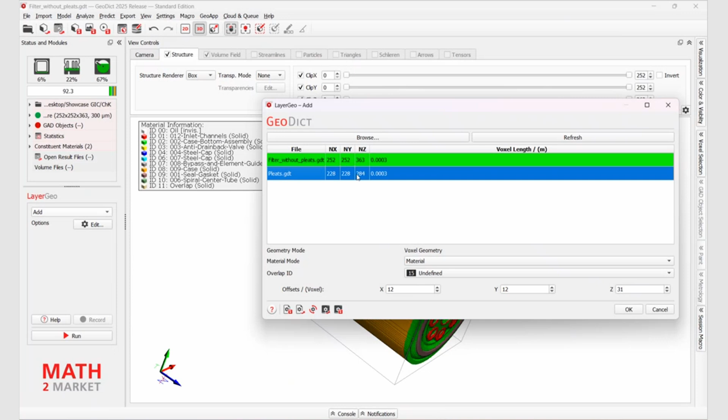So we need an offset. And the offset is the difference between those two values, the half of it. So it's 12 in X direction, 12 in Y direction. And that's why we just looked at the start position of the pleat. It started at 32, so our offset should be 31 in that direction. If you do this, we can load this, and as you can see now, when we slice through the structure, oh, sorry, this was the wrong one. You can see that we now have a new pleat structure in here, which you can also see in the 2D slice.

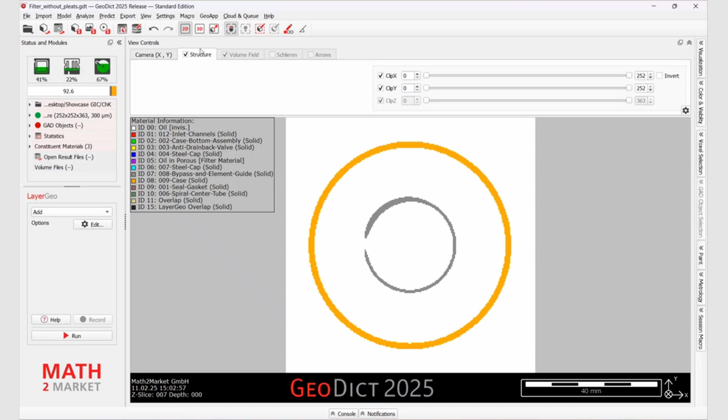So the one thing you should always check is: is the pleat at the right position? Is it in the center, and does it actually start also at slice number 32 as the one before? For this structure this is the case, and you can slice through the structure and see that it also ends at the same position, which means that we gave them the right dimensions to fit in the structure again. From this point on, we can then definitely start to set up a flow simulation.

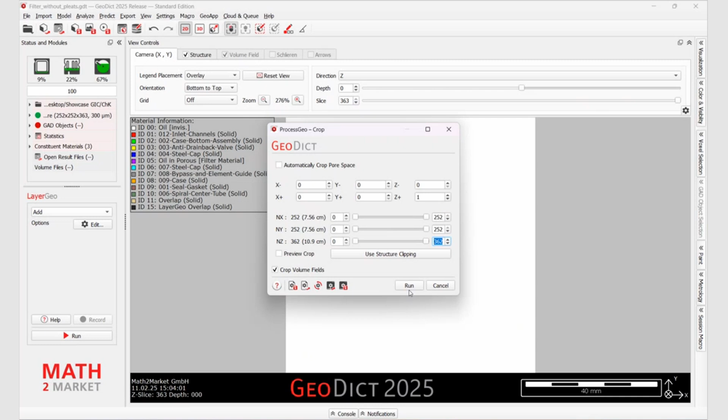So to actually start a flow simulation, we need to clarify some things, which means that we have to check first what is our inflow, what is our outflow. As you can see here, the last slice is empty. And we do not want to have the last slice empty, because if we flood fill our components later on, they will also flood fill inside of the filter. So we want to get rid of this last slice. So what we're going to do is crop out the last slice. And then you can see the last slice is now the last slice of the complete filter.

The next thing we want to do to actually start a simulation, we need to define the inlet and the outlets. For that, we select all the inlet parts.

And we want to fill only the component plane, because we want to only have this not as the complete component, but only the component plane, which is like one slice, as the inlet. So we need to define a new material ID, which is not used in here yet, which is then ID number 12. And so we do not get confused afterwards, we also set in some material information, which is just like inflow. We will click run,

and as you can see now, those parts are now defined as the inflow. Later on, we will select this one, use a new material ID. We will set this as outflow. We will run that. And we want to be sure that everything else, which is not inflow or outflow or inside of the filter, is solid,

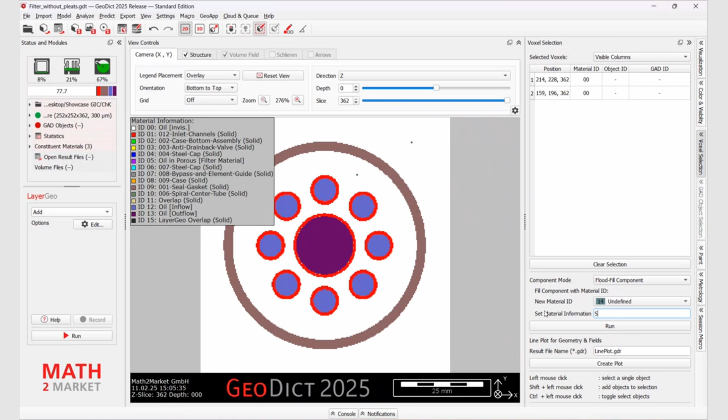so that the simulation runs perfectly. So we select a voxel in here, and we want to run it as a flood-fill component, which means it fills up the whole space as a new material. In this regard, we use ID number 14, and we just call it outer solid, so we do not get confused. This will take a few seconds, and as you can see now, the outer things are solid. These are named as inflow, these are named as outflow, and as you can see through the structure, the inner part is not touched at all, which is awesome.

So the next thing we should do now is check all the materials which are written in here. Because as you can see here, the ID number 14 is oil, which should be outer solid, but oil is not solid, so we have to change the material of ID number 14 to an actual solid material. And yeah, that's what we have to check next.

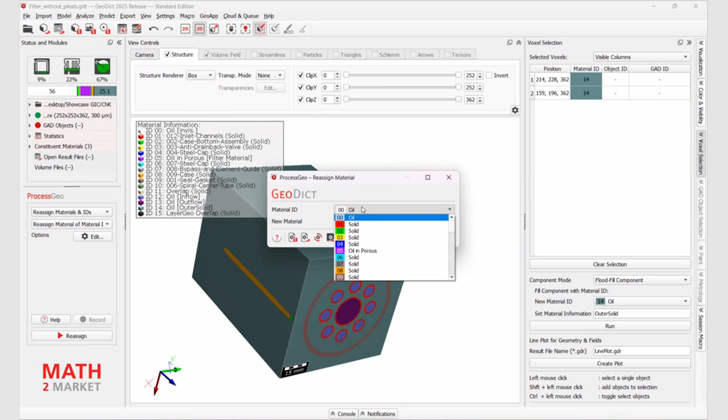So for that, we go to Process Geo. We will reassign the material of a material ID. We will change ID number 14 to a new material, and in this regard, it should be solid. And we also give it a name tag so we do not get confused afterwards. So we will reassign it. And as you can see here, number 14 is now solid. Inflow and outflow should be oil because it's an oil filter.

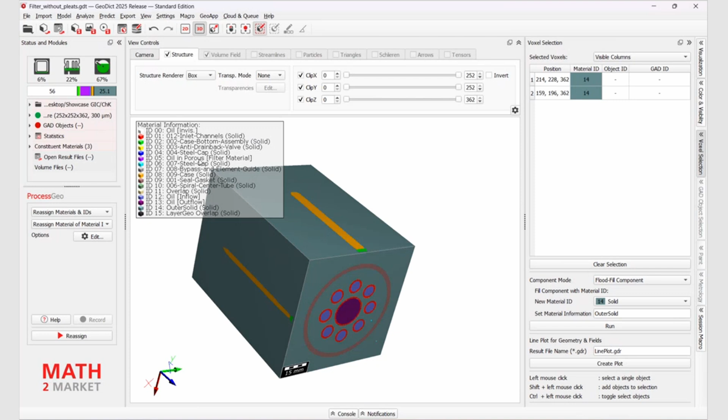And we also have to check if the material of our actual filter is a porous material, because if it's not porous, we cannot set up a flow simulation. Which is the case currently, it's oil in porous. The next thing we will do is set up a flow simulation, and we want to simulate a flow experiment for the complete filter. If you open this, you get all the information in here, and you can see the materials again, and you could also reassign them in here.

What is very important is that whenever there's fluid in there, it has to be the same fluid everywhere, and then you have the green check marks, which is the case in here. And after that, you definitely have to give the porous material a permeability, because otherwise we cannot have a flow through the structure. In this case, we could use 1E-10, for example. Then the next thing you have to do is say what is the inflow and what is the outflow of the structure.

GeoDict directly gets from the names you give the structures what should be inflow and outflow, but you could change it. In this regard, GeoDict realizes that we named it inflow, and it takes number 12 as an inflow, and number 13 as an outflow, because we named it that way, but we could also change it in here. We can also set different boundary conditions like a pressure, or we could say we want to have a different flow rate at the beginning. So we could, for example, go for 4 liters per minute, and then run the simulation.

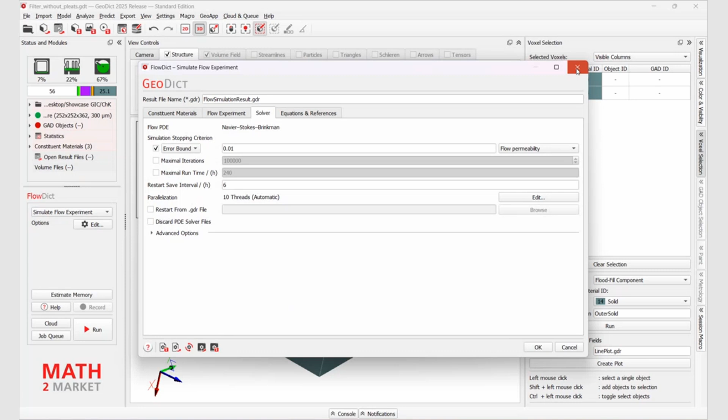This simulation will take a few minutes to compute, and I will not start it yet, but I will load the result files so you can see what you can obtain from these results.

So then I will load the structure in here. So you can see that our flow rate was 0.03 liter per second, and the result is that our pressure is 240 pascals. You can also then visualize the whole thing.

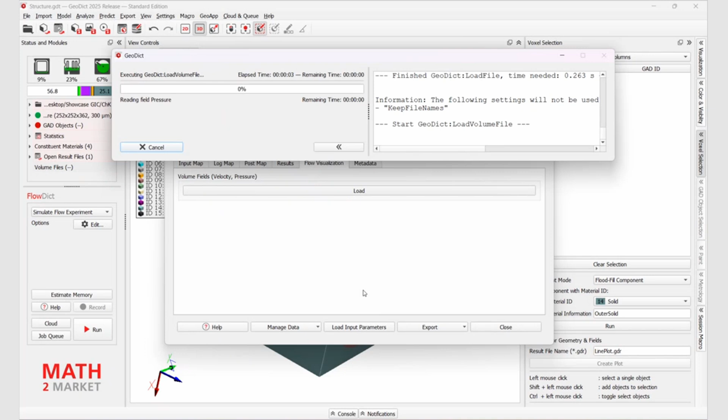I will first load the structure, so we are clear, and as you can see, we are pretty much having the same structure. I just use the same structure as simulation, and then you can also use the flow visualization. Just load them, and from that point on, we want to see every material in here. And as you can see here, we can now get rid of the structure and see the flow fields through

the structure. And we can also, for example, slide through these areas in here, so you can pretty much see what happens inside of the filter, how's the velocity through the filter, and so on and so forth. And the good thing is also you could also look for arrows through the structure.

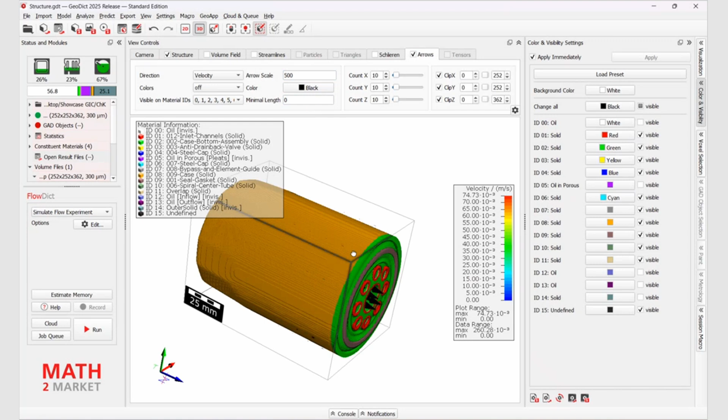And I will just get rid of that, and I will increase the arrow scale for 2000. Oh, this is like too much. 500. And we'll slice this X direction in here, and you can pretty much see how the flow behaves through the structure and where

the flow goes. And you can also mark them depending on the velocity, so you can pretty much see where are the faster areas of the flow through the structure and where are the slower ones. And this is basically how you set up a flow simulation in GeoDict, and also changing the pleat inside of the structure. You could always, for example, use different amount of pleats, also different pleat heights and pleat shapes in

GeoDict directly. And as you can see here, just to set things in perspective, the runtime of this specific structure was 19 minutes to complete the flow through this complete filter in here. I'm open for your questions now, and I hope I made it clear how to set up a flow simulation in GeoDict.

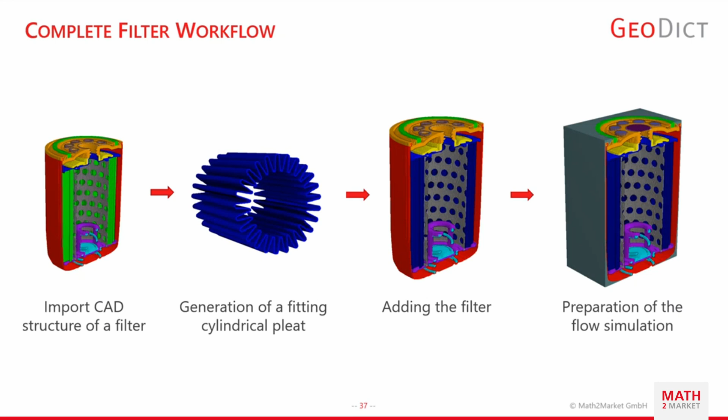So yeah, we showed, I think, a bit of the latest and greatest features, here highlighted from media scale to the filter scale. We showed that we have significant improvements on the media scale, nowadays focusing quite heavily on air filtration, so topics like adsorption, electrostatics. But we also plan to do improvements on the basic filtration, like for example, collision models. We'll come to that on the roadmap.

Then we have always a challenge, as we can simulate on media and on filter scale, that we need to bridge somehow the gap between these kind of multi-scale approaches to still be efficient. For this, we constantly try out new approaches and improvements for this multi-scale simulation. So how can we effectively describe the media in an element or a complete filter simulation without resolving each fiber individually? So one of the parameters, for example, is permeabilities, porosities, and for filtration, we have also some parameters. But to make this very user-friendly and efficient, we constantly try to involve these features in GeoDict.

Furthermore, as you saw, we have a continuous improvement in PleatGeo and the handling of CAD structures. This means we implemented cylindrical pleats last year. Then we also extended or enhanced this by the M-pleat shape. Quite recently, I think it was last week, we had that we have not a constant change in the pleats, but they can be of individual height. So they can be not on a pattern, but we set them as different heights individually.